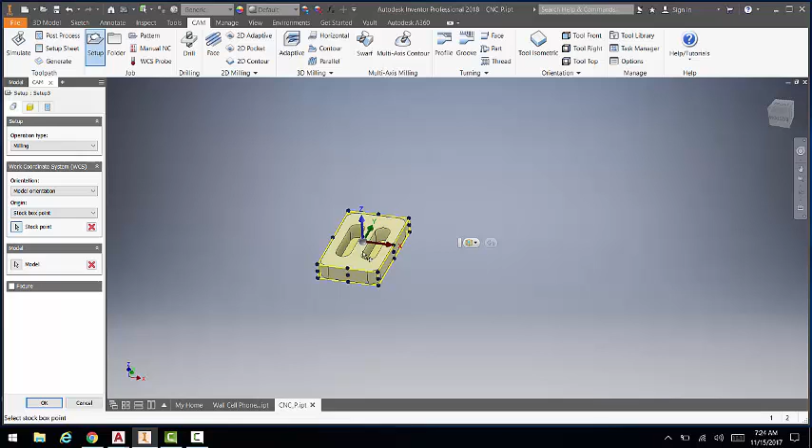Now, a critical thing about the way we CNC stuff is the bit is coming down from this orientation. So your Z-axis has to be pointing up. If your Z-axis for some reason is not pointing up, like this, as you can see, now it's expecting the bit to come in from this side right here, and that's just not the way we're going to set it up.

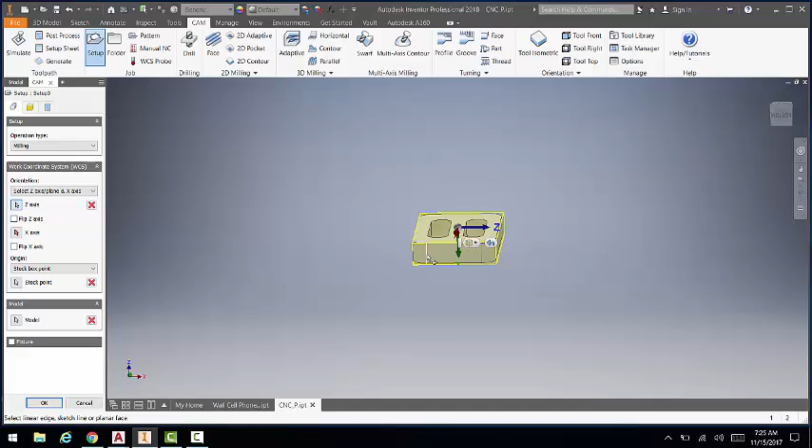So to do that, first thing right here, you're going to select where it says model orientation, and you're going to select either one of these Z-axis options, and you're going to select any vertical line on your part. If it's upside down for some reason, you can just click flip Z-axis, and then you have it there.

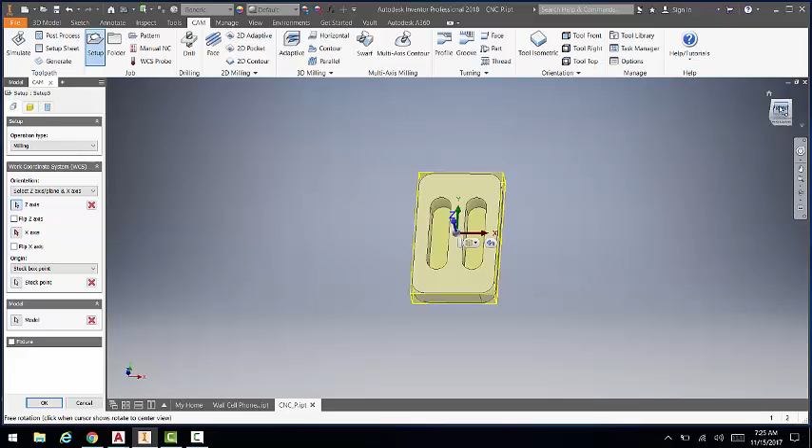In terms of the X and Y, it doesn't really matter in the computer. You just need to know what orientation your X and Y axes are so you know what orientation to put your stock into the machine. So for example, I'm going to put my piece of wood more portrait style as opposed to landscape style because of my X and Y axis orientation. My Y is going vertical, my X is going horizontal.

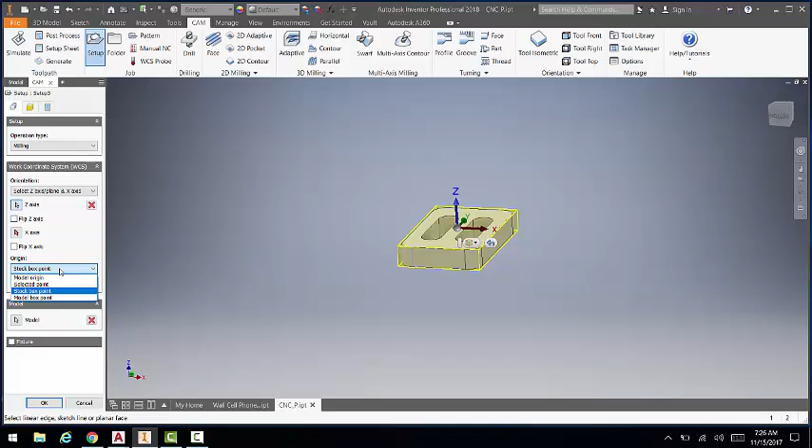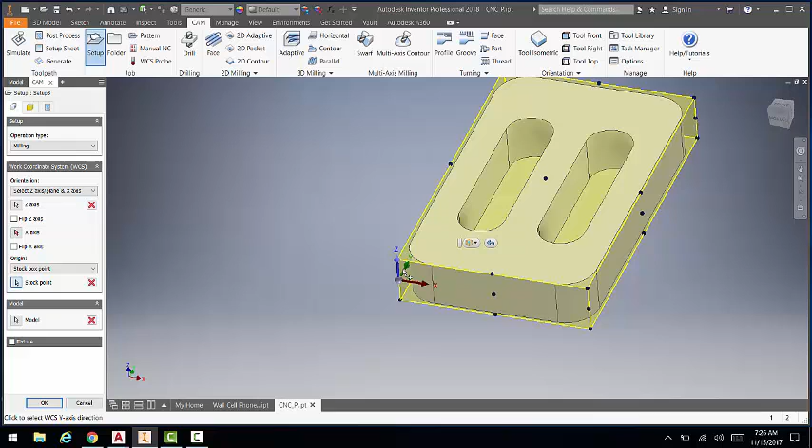Stock box point is our next thing. This is where you're going to tell the machine is 0, 0, 0. I always choose a corner, specifically a top corner. And so this is where I'm going to tell the machine is 0, 0, 0, and then mill from there. Be careful you don't choose a midpoint. Sometimes it's hard to see, so you want to make sure you choose a top corner. Model should be selected already, so that should take care of that.

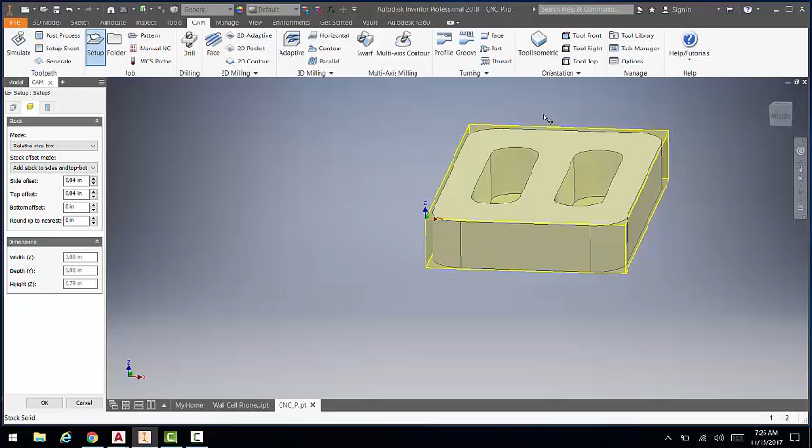And now we go over to the stock tab. We're going to do what's called a relative size box. So it's going to have a minimum stock around it. This yellow prism that you see here, that's the wood that you're putting in the machine, and this is what it's going to cut out.

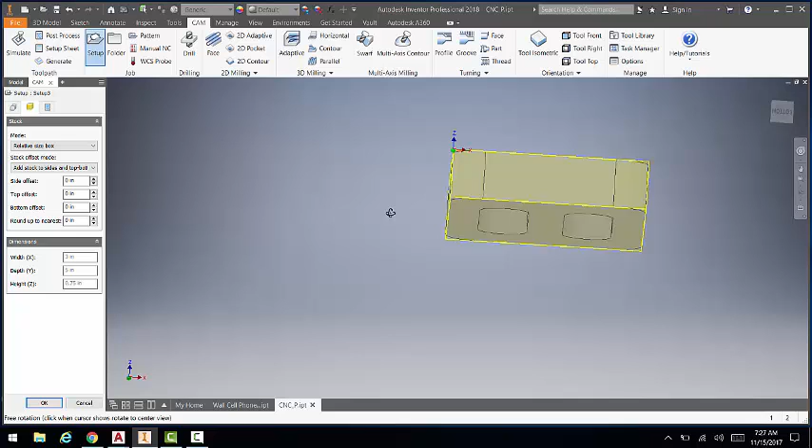We don't need any offsets, so I'm going to zero out all of those things. And as you can see now, this representation of my stock is now the same size as my model, minus some of the corners and stuff. Go ahead and click OK for that. So now what we've done is we've told the computer what size and orientation of the wood we're putting into our machine.

The next setup is a pocket cut. We always want to cut out the pockets or the inside stuff before we do a contour or perimeter cut. If we did a perimeter cut first, this piece would already be loose inside the machine and there's nothing holding it down to do these pocket cuts. So in terms of order, our contour cut is always going to be last. I'll come up here to where it says 2D pocket. Again, it's picking this as 0, 0, 0.

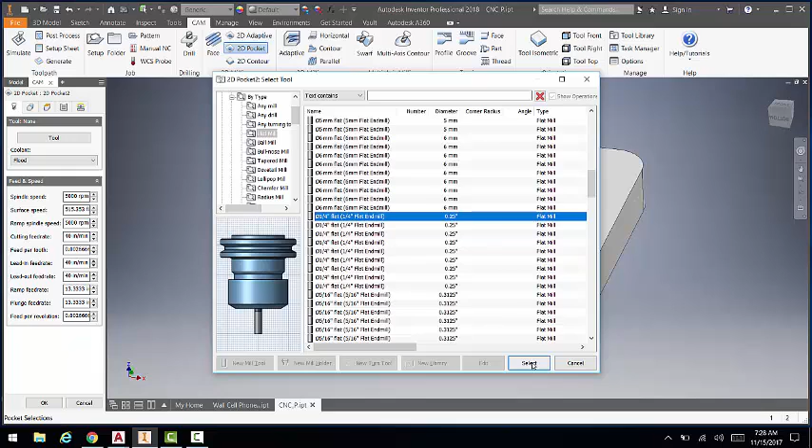The first thing I want to do is choose my tool. I already had this set up, but we want to choose a 1/4 inch flat. The easiest way to find this, because as you can see there's tons of different types of tools, is by type and then flat mill, and then you're going to scroll until you find one of the many 1/4 inch flat mills. Just choosing the top one would be fine. Really any of them should do. There's very little difference in the different types of flat mills. So we'll go ahead and click select. And so now this is, as you can see, the profile of my cut.

Now we've got to do the feeds and speeds. Without getting too into this, the computer cannot regulate the spindle speed on our routers. It's actually done on the tool itself. In case you're curious, they're set up so they're spinning at about 25,000 RPM. As you can see, that changes everything else that we have here. What I want you guys to really worry about is the cutting feed rate, and some of these other options down here.

The cutting feed rate is how fast our bit right here is moving through our stock. 60 inches per minute is pretty fast. We could probably get away with it with pine, but we're going to turn that down to be safe to 40 inches per minute. So it's going to move at 40 inches per minute across my stock as it's moving around. I want my lead-in to also be 40 inches per minute.

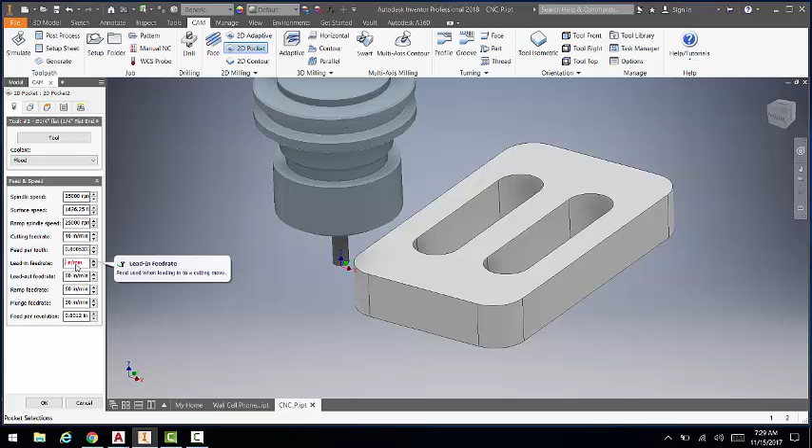If I was to show you a picture of this, my spindle is going to come down and feed in like that, then start moving around my stock. That lead in is going to be 40 inches per minute, as well as it moving through my stock at 40 inches per minute.

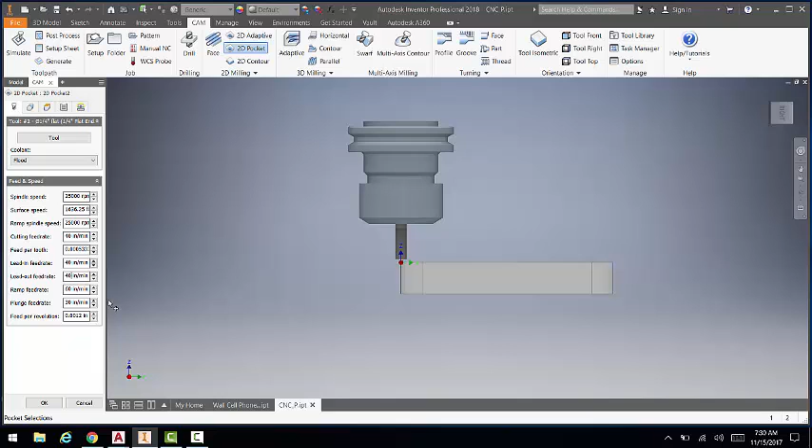Lead out is kind of negligible, but we'll keep it at 40. My ramp feed rate, you'll see this on our simulation, but this is when it starts to spin to cut out these slots right here. I'm going to take that all the way down to 20 inches per minute. And my plunge feed rate, although I'm not using a plunge on this operation, I'm going to change it to 15 inches per minute.

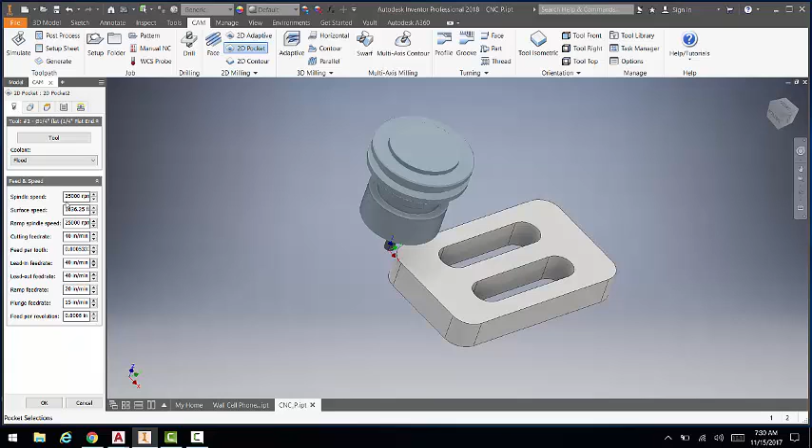All the other ones leave as the default. They're really not going to affect anything here, but you may want to write these values down to have them for future reference. On to my next tab, geometry.

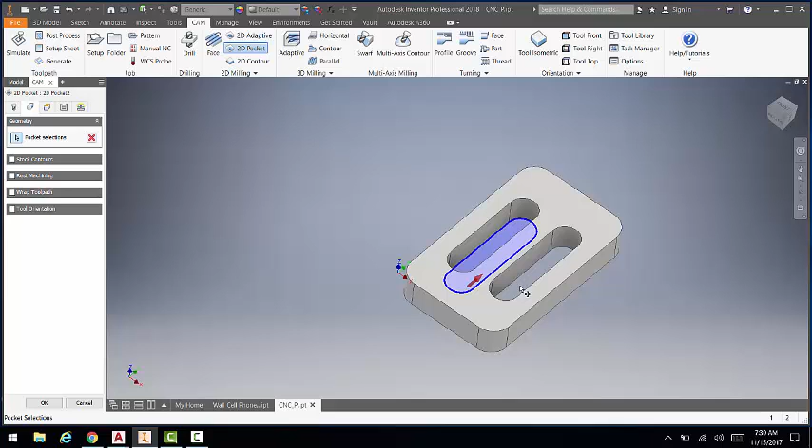So these are my pockets that I'm selecting. Since both of these pockets are of the same depth, I can go ahead and choose them both at the same time. Always choose the bottom edge of your pocket, even your contour, always the bottom edge, and you'll see why that matters later. Also make sure that arrow is correct, this is a pocket cut, so I want to remove all the material inside of here. If the arrow is on the outside of your cut, just click on it to move it to the inside.

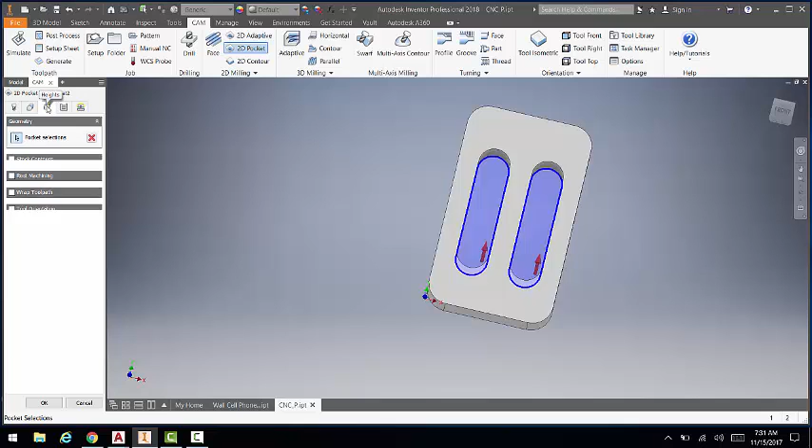For a pocket cut, we can go ahead and move on to the next tab, which is my heights tab. This is the height of the bottom of the bit. This is my clearance height, retract height - as you can see here, it's orange, so this is how far it's going to remove. This is my retract height right here when it moves from one pocket to the other. My feed height, where it starts to ramp up speed and starts to plunge into my part. And then my top height and my bottom height.

We're going to adjust these a little bit to make sure we are safely moving through our part. My stock top, my retract height, I'm going to change to 0.3. My feed height, I'm going to leave at 0.2. My top height here for my stock top, this is where it thinks the top of my wood is in this case, I'm going to change that to 0.1. That way my first cut just barely touches my part, so it's not diving into the part too hard.

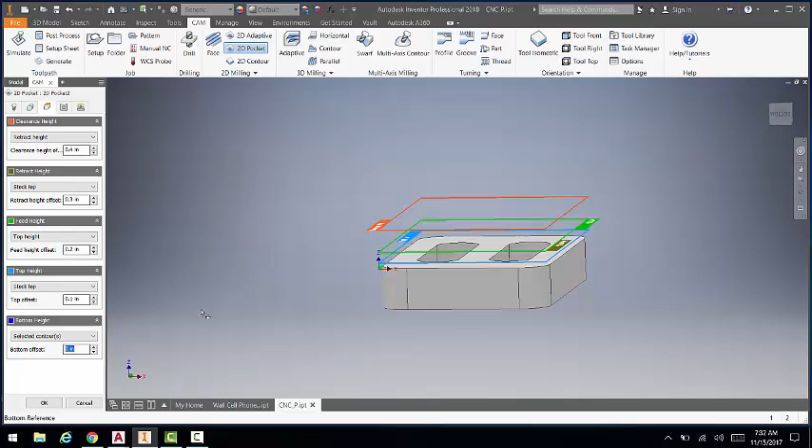And then my bottom - it says selected contours. If you remember back on the geometry, we selected the bottom edge, so it thinks that's our bottom, which is what we want. But just to make sure we get through the whole thing, we're going to put a negative 0.1 on there so that it cuts all the way down through the bottom to make sure we completely clear out our part.

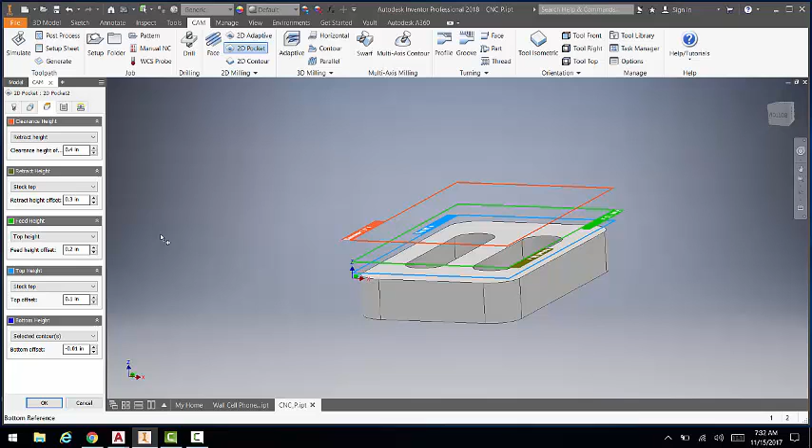Next tab, passes. A couple things here: uncheck stock to leave. We don't want to leave any stock, we're going to go ahead and machine it perfectly.

Go ahead and check smoothing. If you look here, smoothing gives you a nice smooth arc when it comes around here. I'll add a 0 to smoothing, and if you hover over here and read the box that shows up, it says make smoothing and tolerance the same for the best operation, so let's add a 0 here as well.

Now, you need to have multiple depths. You don't want to plunge all the way into this and go around in one pass, you're going to incrementally take out wood right here. So I'm going to check multiple depths, and for us, our depth is going to be 0.1. So if this is 3/4 of an inch thick, it's going to take 7, or technically 8, passes to get all the way through, going down 0.1, 0.1, 0.1, and so forth until the very bottom where it's going to take out 0.05.

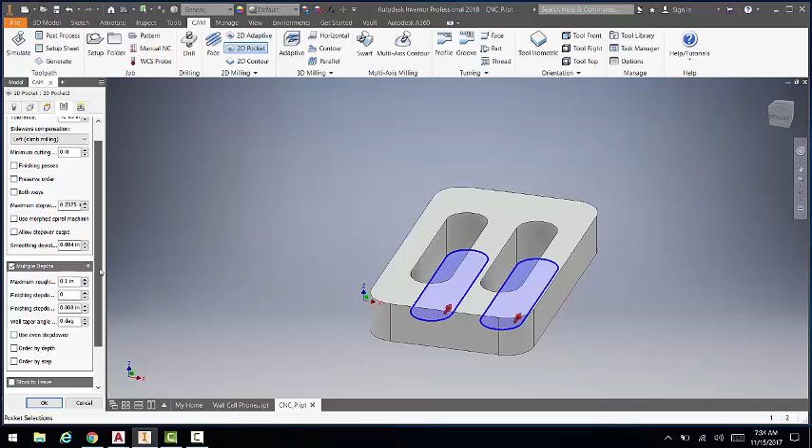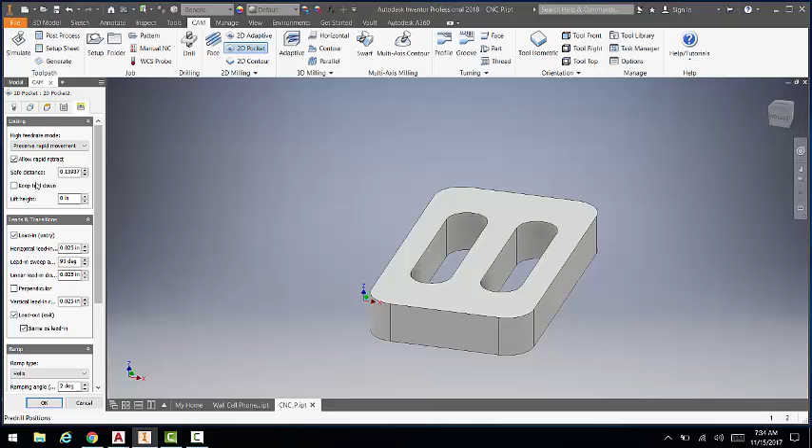Everything else we can leave the same. Let's go to our final tab here, and you want to uncheck keep tool down. This way, if we had that left checked, when it's finished cutting out this pocket, to move over to this pocket, it would stay down and cut right across here, cutting out your piece of wood in the middle. We want it to retract up to the previous heights tab we set up to make sure it moves over to the next operation and starts everything there. All of this we can leave the same, and we'll go ahead and click OK.

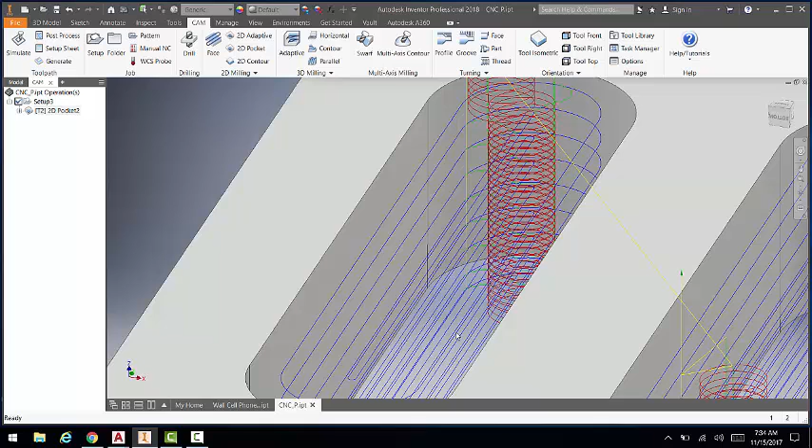As you can see, it's generating our toolpath. If you don't get a toolpath generated, you've made a mistake somewhere. If you look at this, it's going to start its plunge right here, and then actually start cutting out. This is the feed rate shown by these blue lines here.

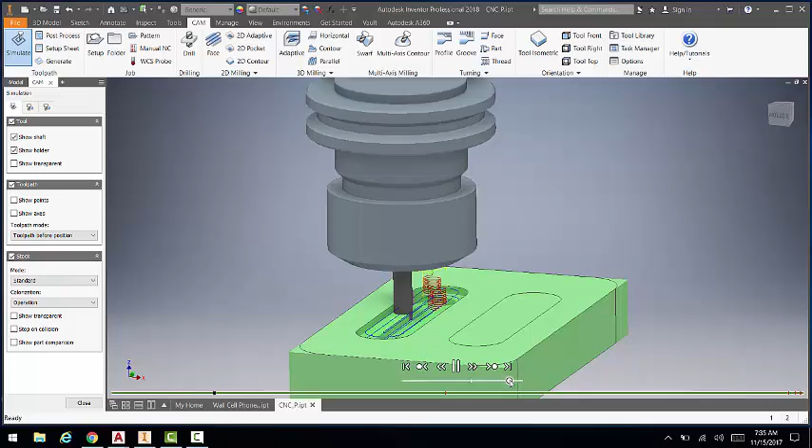I go ahead and right click and go to simulate, check the box that says stock, and go ahead and hit play, and you can actually simulate what this is going to do so you have an idea what you have going on here. By dragging this cursor right here, you move it around a little faster, and you can actually see the stock going away.

Everything there looks good, about the way I want it. I'll go ahead and click close, and now I have to do my second operation, which is a 2D contour. Go ahead and select 2D contour.

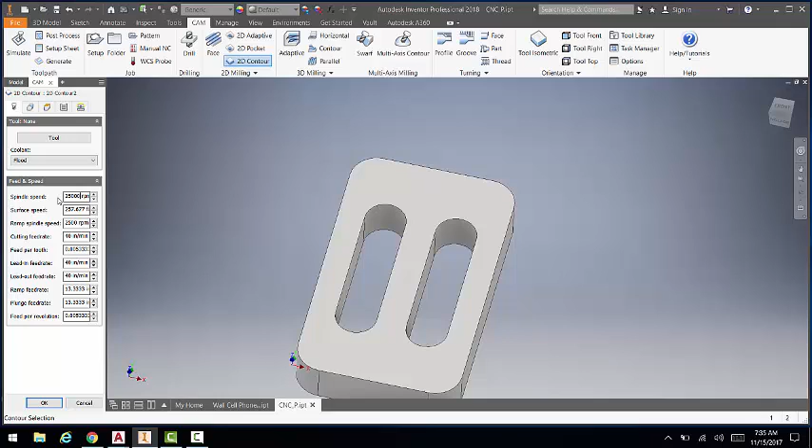The nice thing is all my feeds and speeds got saved. It just used the previous settings, but this one didn't, so I'll set it to 25. Now everything didn't get all changed, so we'll go ahead and change this back to 20, and this was 15. All right, 40, 40, 40, 20, and 15.

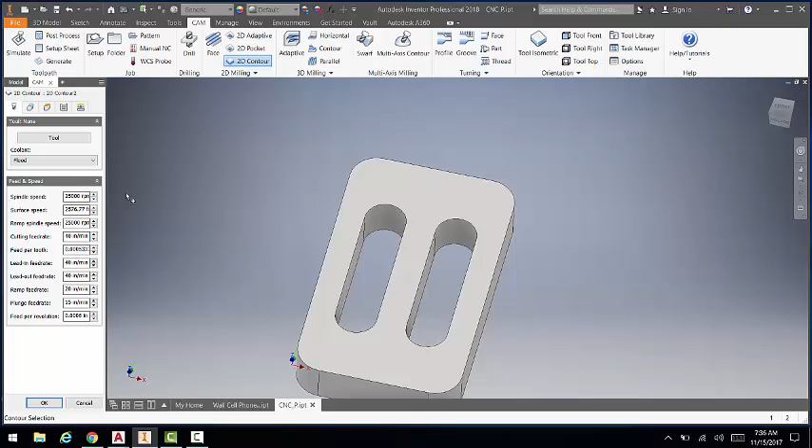All right, for my tool I'm just going to choose my previously selected tool. I'm not changing the tool, so this is the tool that's used for the 2D pocket, so I'll go ahead and use it for this as well.

Next tab, geometry, stock contours. Again, I want to click the bottom edge. I want to make sure my arrow is on the outside of my part, so it's cutting it out. I don't want it to be on the inside of the part, outside.

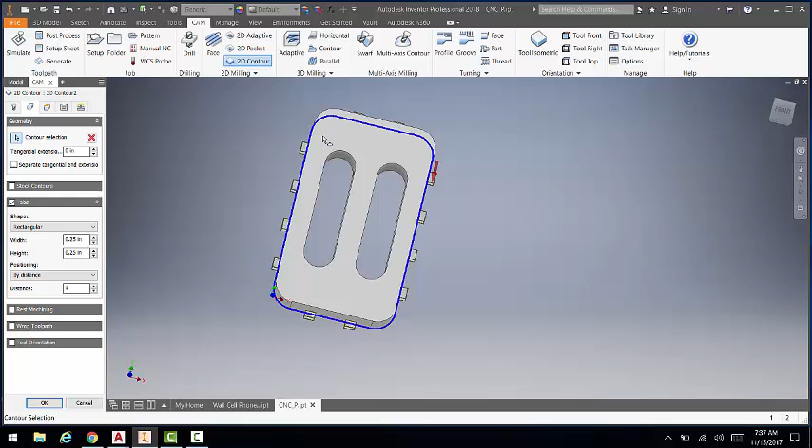That's a really thin tab at 1/16 of an inch. I make them 0.25, and just for argument's sake, I'm going to go ahead and change the spacing to 1 so that I have more tabs going around. We'll take these off with a router later. It's really easy, but you need to have tabs, and you want to make sure you've changed the thickness of the tab so it's taller like that.

Going to my heights, again just like my previous one, 0.3. Stock top, I'm going to go 0.1, and then bottom offset negative 0.01.

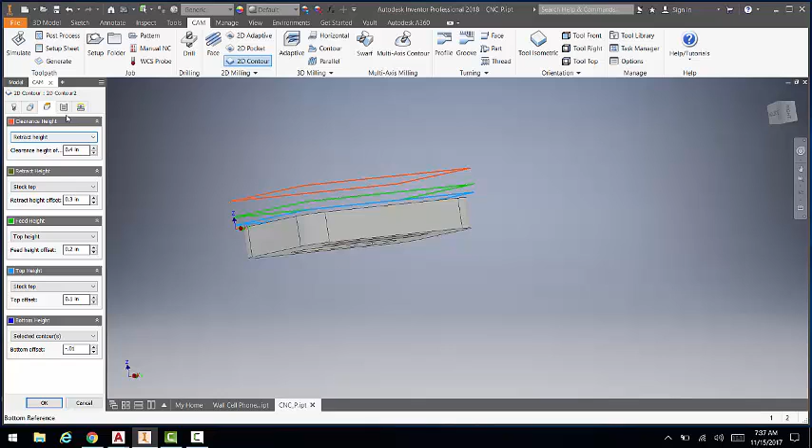All right, passes again, make these the same, check smoothing. Oh, I can make that okay, as long as they're the same, it's fine. That's probably a little too high. That's alright though.

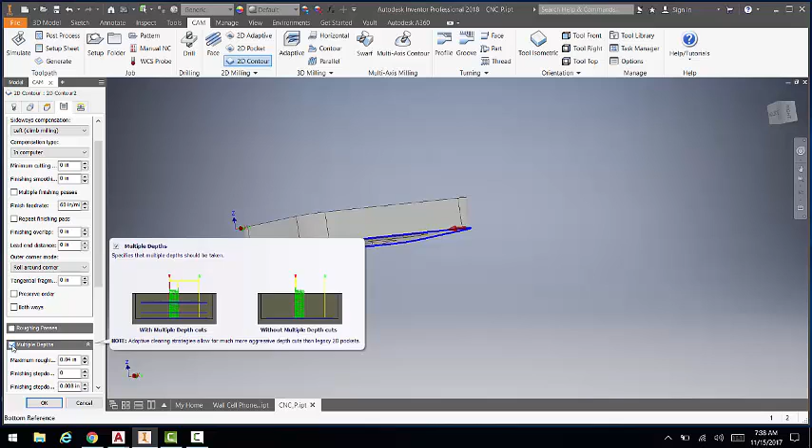Multiple depths, we always want to do multiple depths. Change this to 0.1. Everything else looks good. Final tab, again make sure keep tool down is unchecked. Click OK.

So as you can see here, it's going to come around, it's going to lift up and not cut out stock right through here. Alright, we're going to cut that out on the router later after it's all said and done.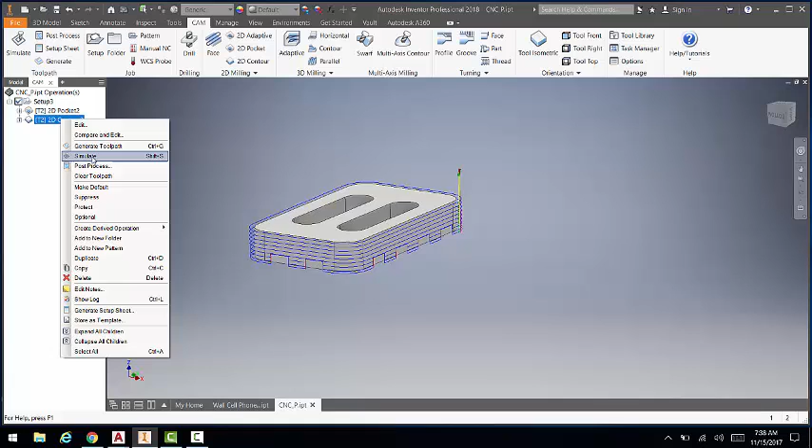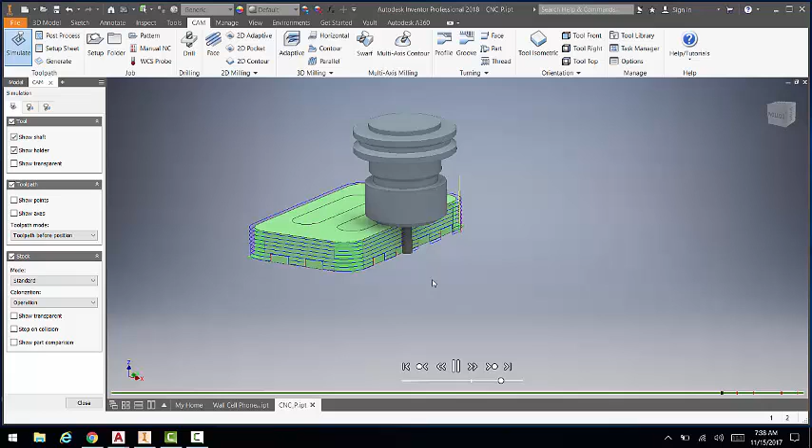I'll right click on it and go to simulate. I'll make sure the stock is checked. I'll go ahead and click play, and I'll move it down, and I'll show you. So if you see here, the router bit's actually picking up and not cutting out these tabs, and we're going to remove them on a different tool after the fact. Also notice that it's cutting just a touch below my stock. That's that negative 0.1 I put to make sure my entire part gets cut out.

Go ahead and click close. And now you're going to click on setup. You're going to right click on setup and go to post process all. This is where it's now going to convert this file that we just set up to G-code.

You can leave that the same up there, configuration. Post configuration, this is the language that our router uses. There's a ton of them. We use emc.cps, so this is the language that can talk to our router. It should end in a .ngc. If you don't have a .ngc, you don't have the correct file type.

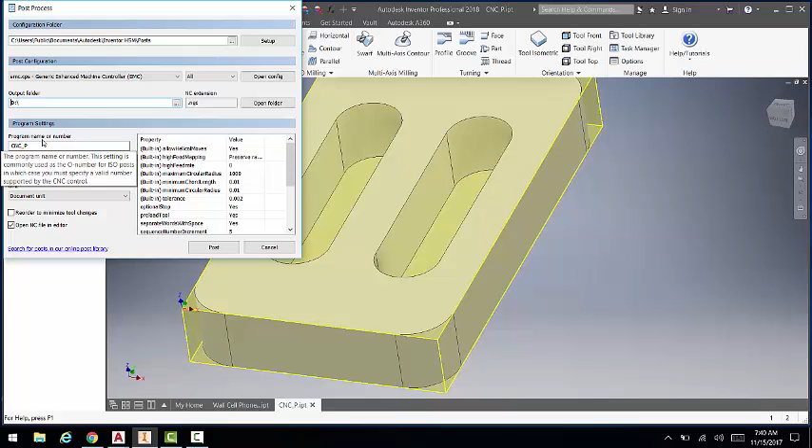Program name, CNC practice, output folder. You're going to need a flash drive for this, so I'm going to go ahead and have my USB drive selected. And then this is the file name it's going to save in there. I'll go ahead and click post.

That's exactly what I want. Click post. And if you give it a second, you're going to have a bunch of lines of code show up. You want to make sure you have, these are all the coordinates right here. This is our G-code, all the coordinates that's going to go through as it cuts out your part. As you can see, it's almost 3,000 lines of code.

So everything there is looking good. You don't need to save this, it's already saved, just close it.

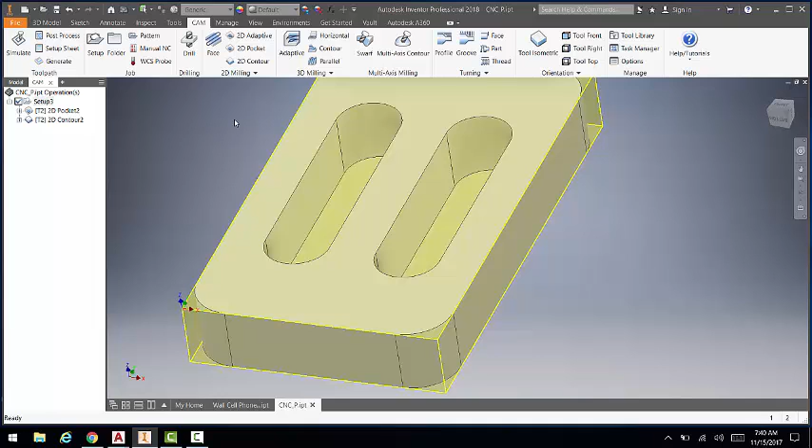One thing you can do that's kind of nice, if you go to simulate and hover on this part down here, you can kind of get a time, a total run time on my part. Let's see, I got 11 minutes for my slots and then 3 minutes to cut the whole thing out. So I'm going to be about 14-15 minutes to go ahead and machine all this once I hit play on the machine.